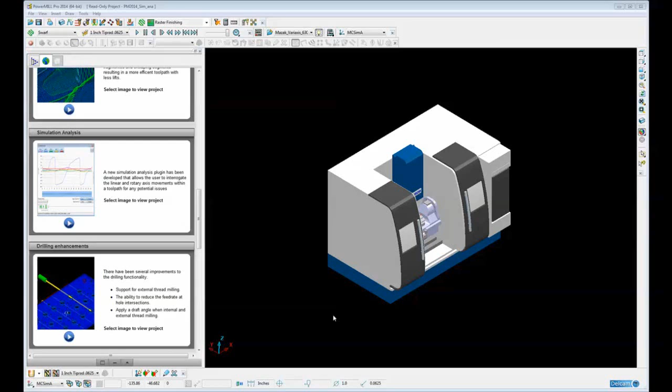A new plugin has been developed that allows us to analyze the machine tool simulation so that we can interrogate the linear and rotary axis movements within a toolpath for any potential issues, such as axis reversals, for example.

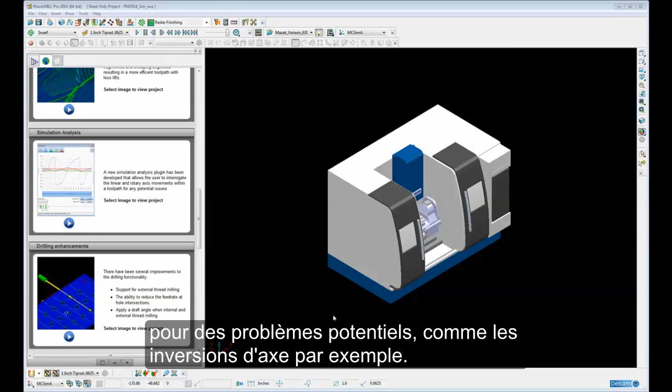If we view our plugin window, here we can see the simulation analysis plugin at the top, and we'll just go through an example of how to use the plugin.

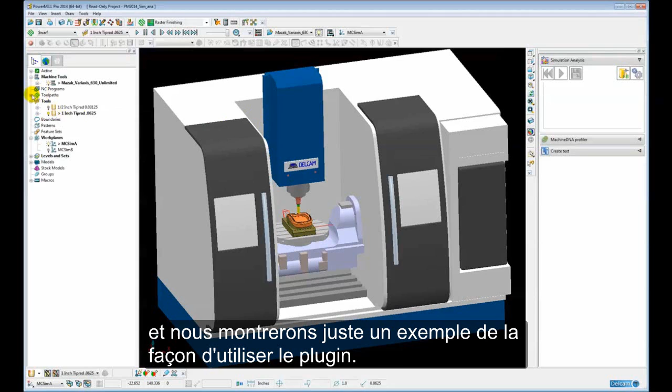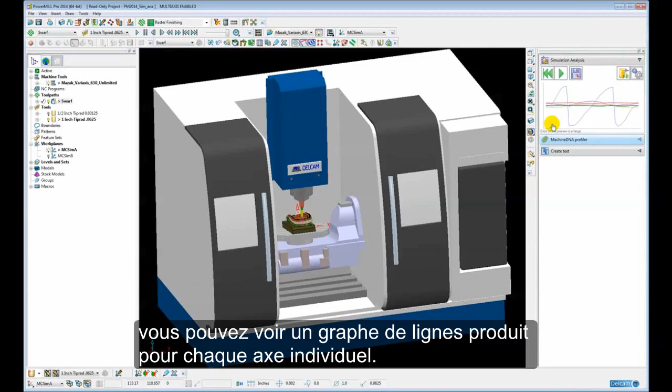So if we simulate from start, activate the toolpath and then simulate from start, and then save the simulation, you can see a line graph is produced for each individual axis. If we click on the small view here, then it brings up a much larger window.

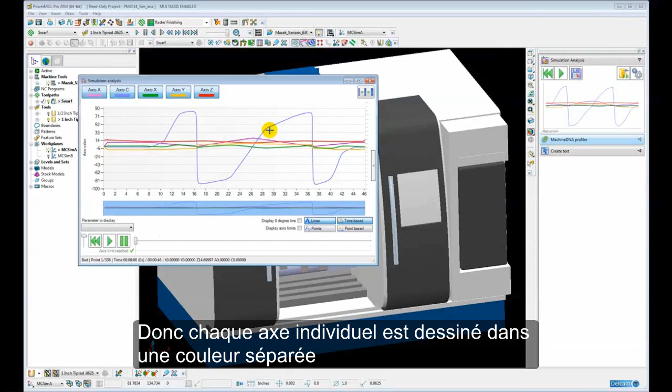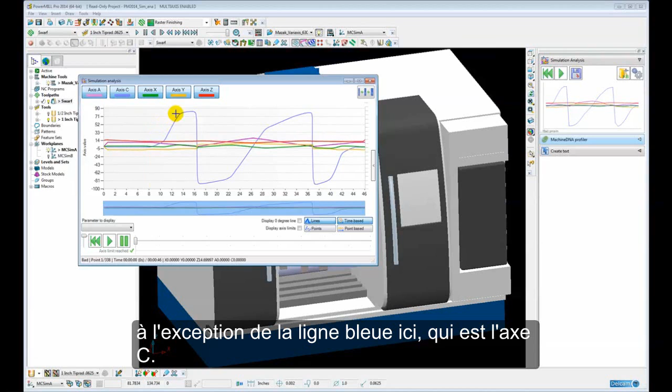So each individual axis is drawn in a separate colour, and we can plot the axis angle against the time or against the number of points in the toolpath. If we look at time based, we can see here that most of the axes are well behaved, with the exception of the blue line here, which is the C-axis. So the C-axis is the rotary table on the machine.

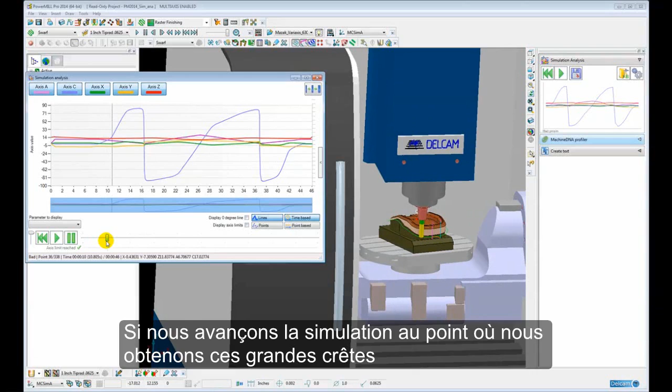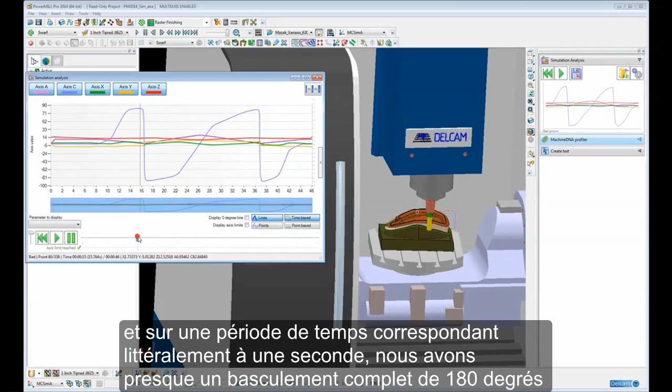So if we just fast forward the simulation to the point where we get these large dips and large peaks in the C-axis, you can see the C-axis is rotating positively, and then all of a sudden it reaches this peak of around about 82 degrees. Over a time period of literally 1 second, we have a full almost 180 degree swing of the C-axis from positive 82 degrees to negative 87 degrees.

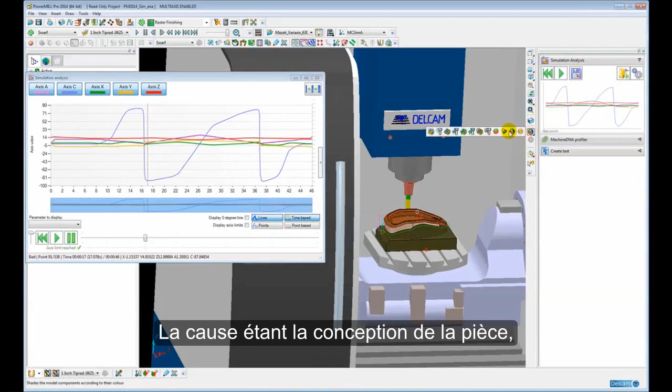This all occurs over a very small distance, over a very small period in time. The reason for this is because of the design of the part, where the draft surface on the side of the part goes from positive to negative.

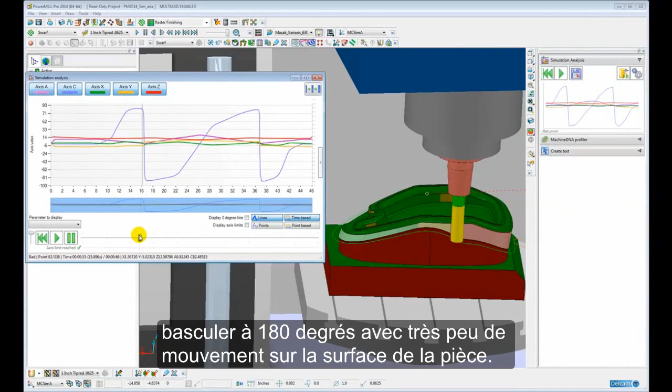And because of this positive to negative shift in the draft, the machine tool has no choice but to swing through 180 degrees with very little movement across the surface of the part. So this is going to lead to potentially a very bad surface finish in this part, because we have a very rapid movement of the C-axis but a very small movement along the part surface. So this is obviously easily identifiable using this new simulation analysis graph.

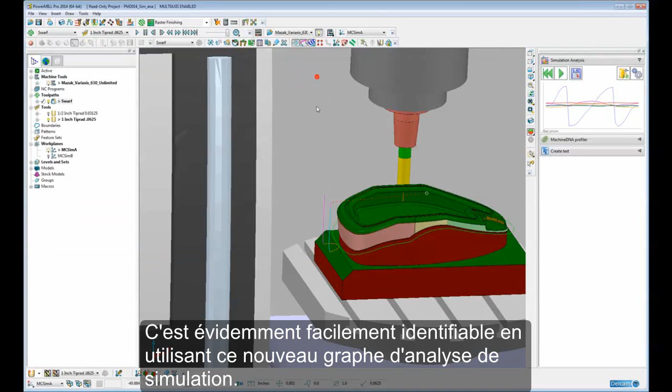So let's have a go at getting rid of this sudden swing in the C-axis. Now the only way to achieve that would be either to remodel the part, which obviously is not possible in a lot of cases, or to reorientate the part on the table so it doesn't go from this positive to negative draft angle.

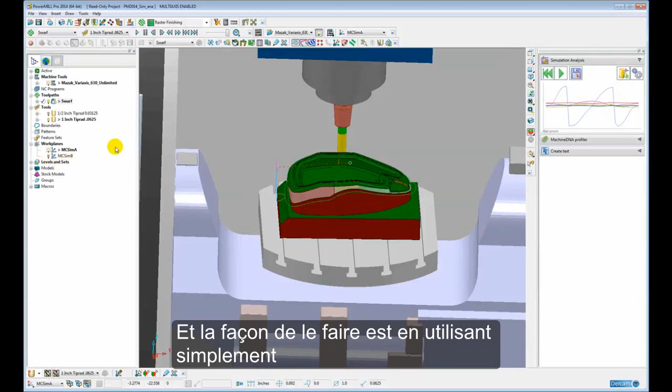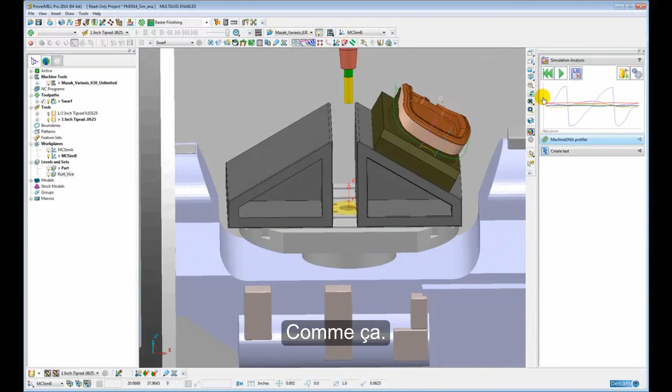And the way we can do that is by simply using a different datum orientation and positioning the part on an angled vise, like so. So now if we rewind the simulation...

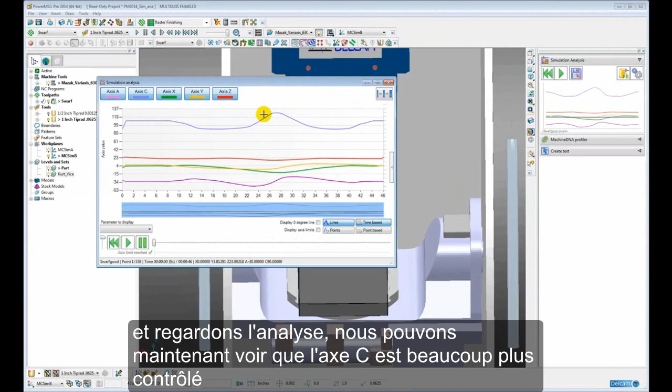and replay the simulation and then save the simulation again, and then view the analysis, we can see now that the C-axis is far more controlled and has none of the peaks and troughs that we had in the previous toolpath.

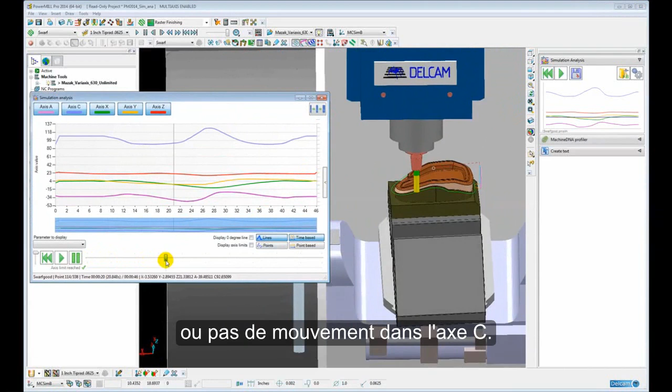So if we now just play the simulation forward again, we can see at the point where we had the sudden swing in the C-axis, it is now nice and controlled and there's very little or no movement in the C-axis. The only time the C-axis now rotates a large amount is when the tool has to swing around the front, but again it's in a controlled manner, and back to the beginning.

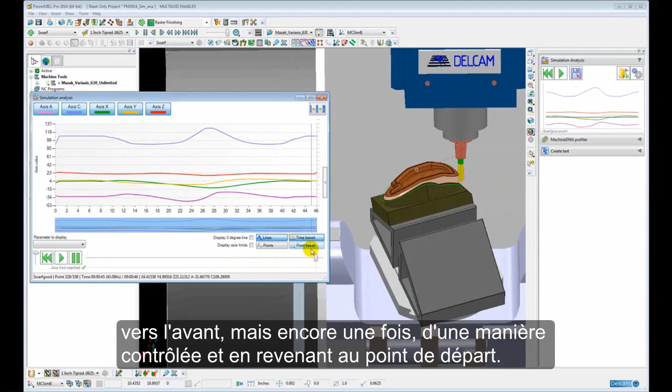So the simulation analysis graph is a great visual tool for easily identifying any potential problems with our toolpath in terms of possible surface finish issues or axis reversals.